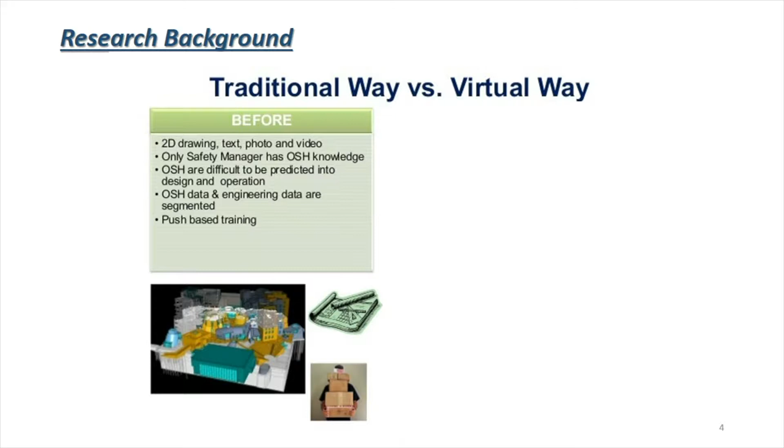So from the health and safety perspective, we should all be familiar with that sort of thing. And when we try to move to virtual environments and using 3D models, many companies are now actually using BIM to do their SWMS, their safe work method statements and so on, and even doing 3D or 4D models in order to train people up in difficult operations.

So BIM is having an impact on safety. And the 4D is actually a really good way for even inexperienced construction planners to recognise potential safety issues.

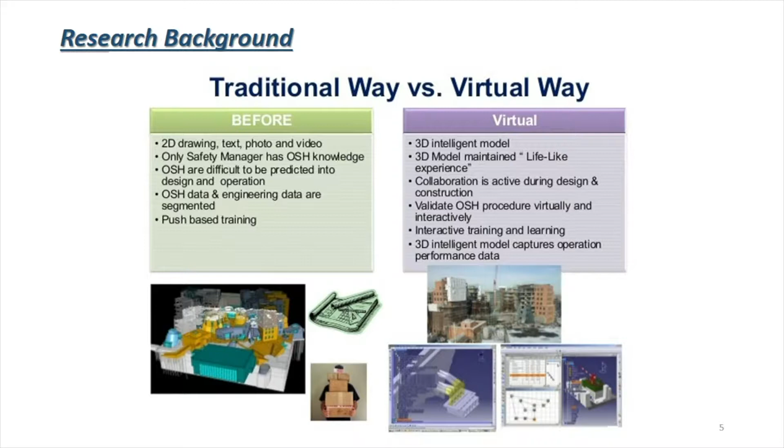So where we started with this, there is a lack of research on how BIM is going to impact on OH&S in Australia.

And we've actually turned this around a little bit. We're taking a problem-driven approach. We're actually looking at what are the causes of accidents and which are the major ones, and actually trying to analyse reliable data. Interesting number, I was reading an article in the New York Times.

They said that in the US, something like a third of the causes of death are actually incorrect. And if you actually look at OH&S data, many of the causes of accidents on site that are non-fatal tend to make sure that none of the people who write the report are to blame.

So we took a much more reliable approach, which I'll explain in a minute. Okay, so Hamid's also been looking at innovation theory and how innovation spreads through industry, looking at the issues around identification of the problem, evaluation, commitment, preparation and implementation.

And he's been using a causation model that was developed at Loughborough University with lots of surveys and interviews, and focus groups with victims, witnesses and so on, so it's apparently a fairly reliable model. They've built this around systematic interaction of the factors, and it has been used and validated by other groups.

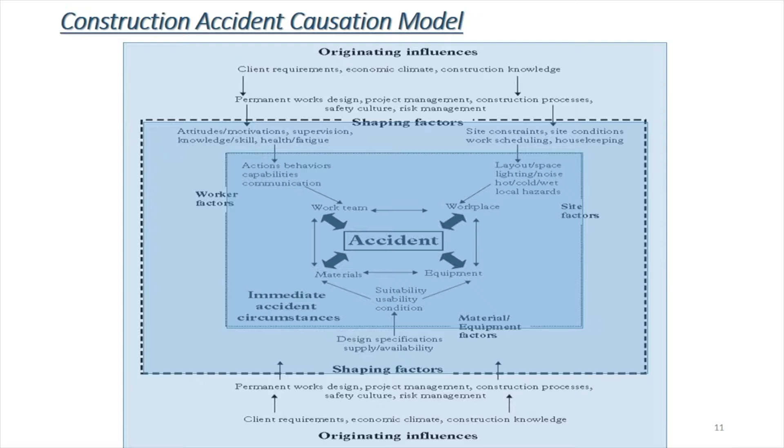Hamid analysed 109 fatal accidents in Australia. This is reliable data because fatal accidents are examined by a coroner who has no vested interest and actually digs very deeply into what caused the accident.

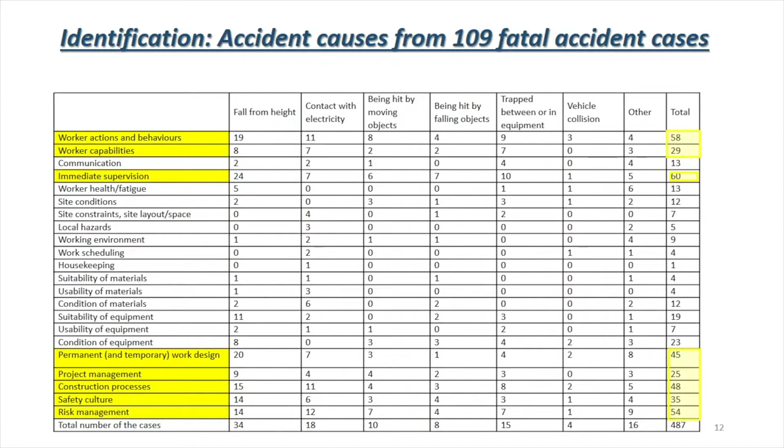He's gone through a series of interviews with industry experts in BIM, identifying the causal factors for the deaths, and then spoken to people who have significant experience in BIM and asked them to identify what aspects of BIM could be used to mitigate the causes of these accidents.

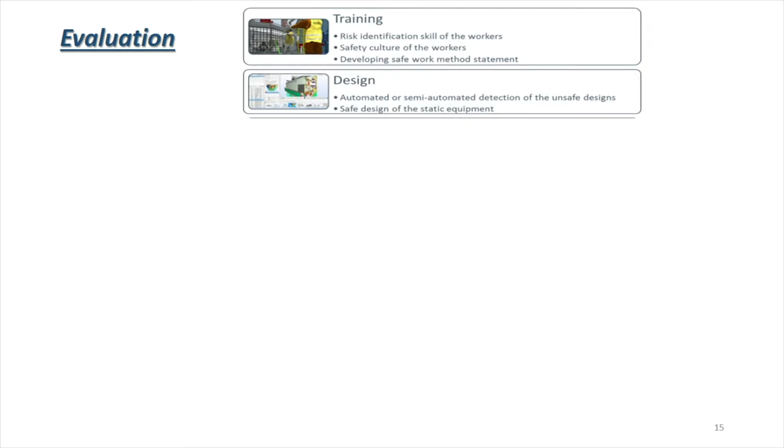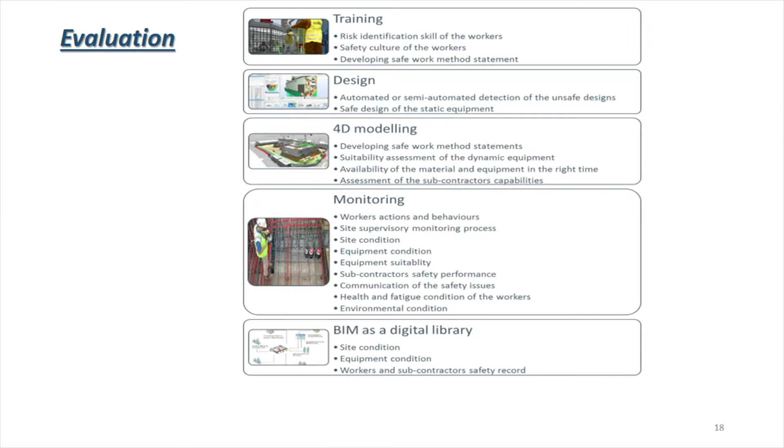Under evaluation, he's looked at issues around training - how do we train the industry, how we can look at design for safety using 4D modelling, how we actually monitor on-site processes, and the opportunity of using BIM as a digital library - how can we use BIM to share experience across the industry and change culture? And issues around how we can use BIM to pick up issues around particular pieces of equipment and material supplies.

If you think of the Grenfell Tower disaster, where there was a totally inappropriate use of materials, which could have been picked up if anyone had bothered to read the manufacturer's literature properly, we can understand how important that can be.

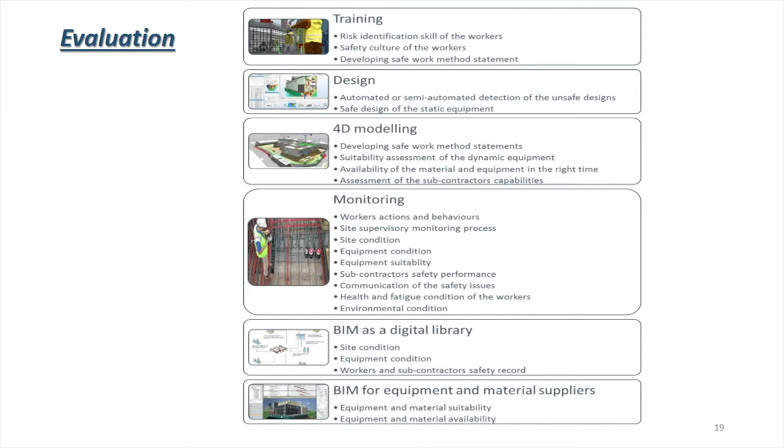There's lots of discussion in Australia, at least, about now that the external cladding issues have come up, how you could go back and find out which buildings have materials in them that are now recognised as being unsafe rather than at the time they were installed. Asbestos is an obvious example of where that sort of thing could help as well.

In preparation for this, you basically have to have the appropriate technical hardware and software in the companies. The issues around time and budget, potentially using automation in the software tools to smooth things and make the uptake more efficient, creating new roles and responsibilities.

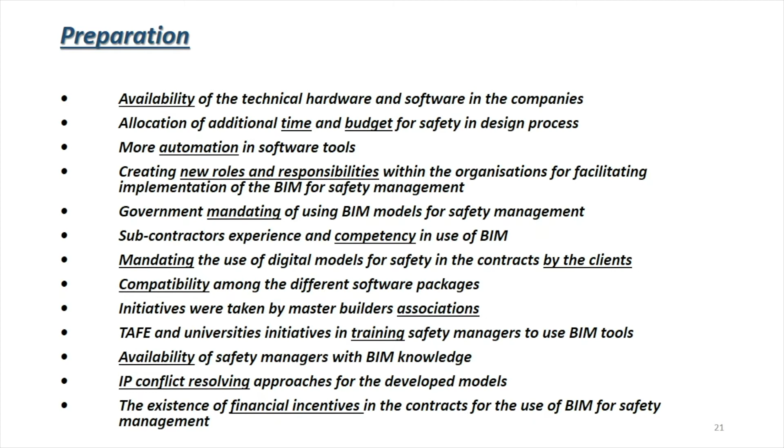I keep pressing the wrong button.

Then with implementation, you've got the issues around continuous monitoring. If we start having processes about using BIM for continuous monitoring of progress on projects feeding into cash flow, for example, then there's opportunities to leverage that into the recognition of OH&S issues.

How do we get the information about this to subbies? The issues around liability of data - 'oh, you didn't tell me this was happening, so it's your fault that the accident occurred.'

And then how do we actually build BIM models to incorporate the safety information? How often do we update this? And then how do we provide this information through to asset management, facility management later on, where people have to come in and maintain things?

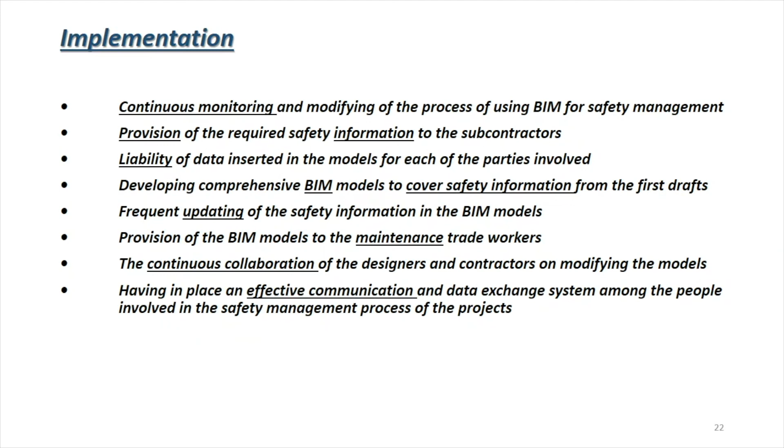I think Robert had some nice pictures of pumps down in the basement of your building - so how do we maintain that? And then the issues around continuous collaboration between designers and contractors during the project to keep the models up to date. And the overarching thing about just supporting effective communication, which is supposedly one of our excuses for doing BIM to start with.

I'll answer any questions that you have, or attempt to answer them, and if I can't answer them, you can email Hamid.